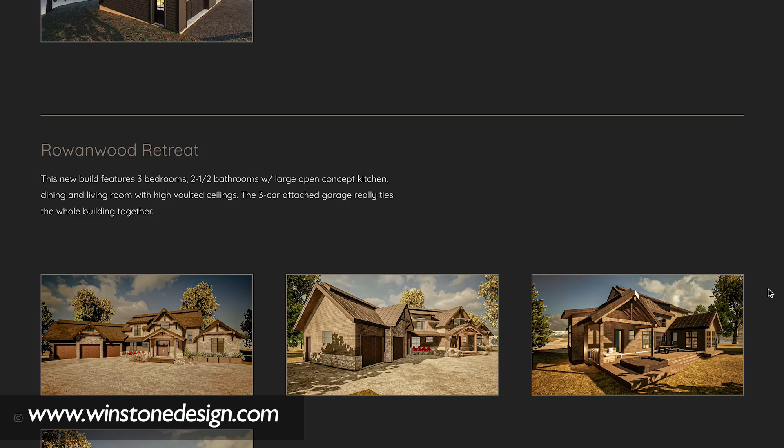I think it's important to note, because I want to stress, that the level of detail produced by tools such as ArchiCAD and ArchiFrame together is completely possible and efficient to manage on your own. And integrating this into a bigger firm is definitely easy.

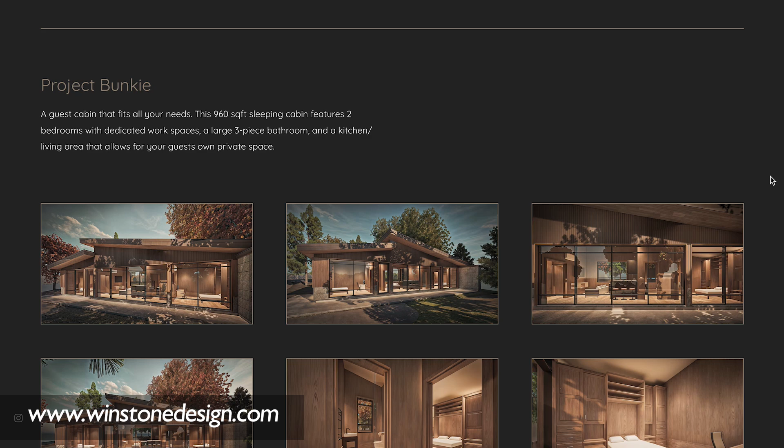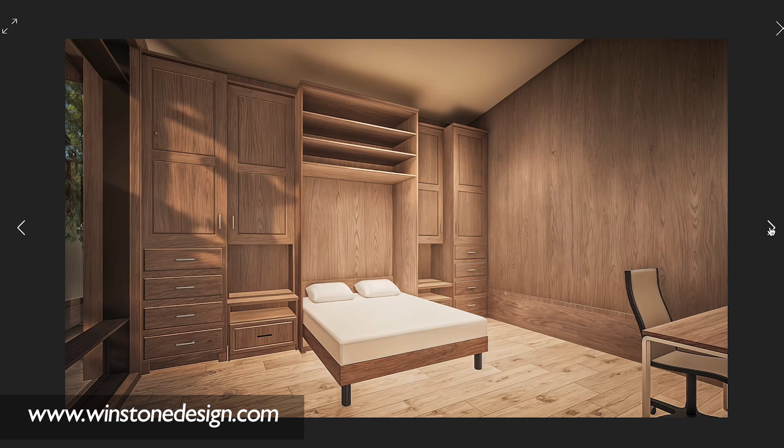I've been operating my business since 2020, previously as a dedicated Revit user. But as of 2023, so for the last 2 years now, I've been fully using ArchiCAD. It was definitely a stressful switch. I can talk a little bit about the benefits I see with ArchiCAD, but along with that came ArchiFrame, and its integration has completely transformed the way I do documentation.

This is a simple 22-foot by 22-foot garage that was done for some customers local to me here. They're actually friends of mine, but this is just to show the level of detail that gets put into this.

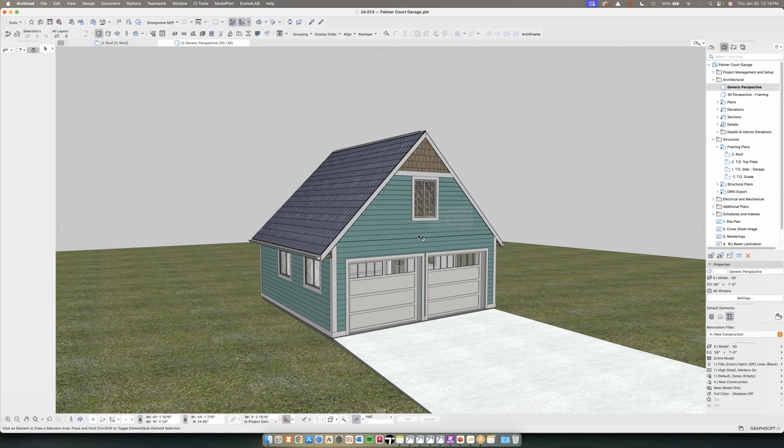So this is the generic 3D model that most people would see, but just by creating a layer combination, we can take that model and turn it into a complete wood frame structure with individual components for lintels, trusses, outlooker framing, sub fascias, and nailers for soffit. Again, it's very simple, very straightforward and easy to use.

I won't do much examples, but just to show you the power and level of detail within this, all of this is automatically generated.

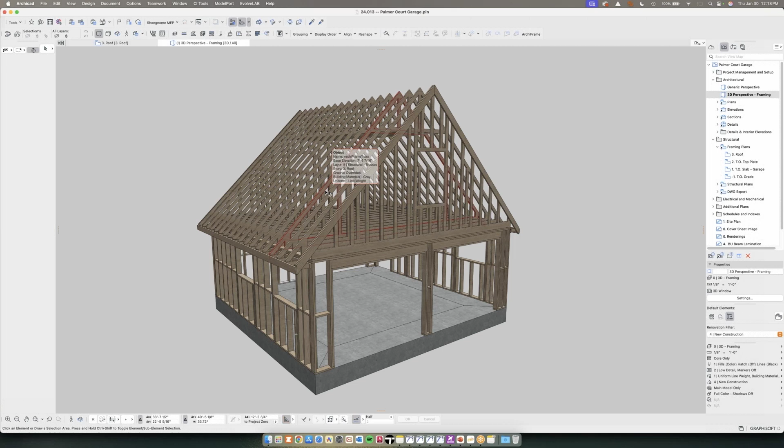In terms of scale and time, this entire building was probably framed out in under an hour for trusses, wall framing, and everything. And this entire project was probably completed start to finish, from concept to final documentation, in about 32 hours. It's a really efficient process once you get the parameters set up.

And the people at ArchiFrame have been really fantastic in terms of catering and tailoring the parameters that I want to see on the plans, which has been fantastic.

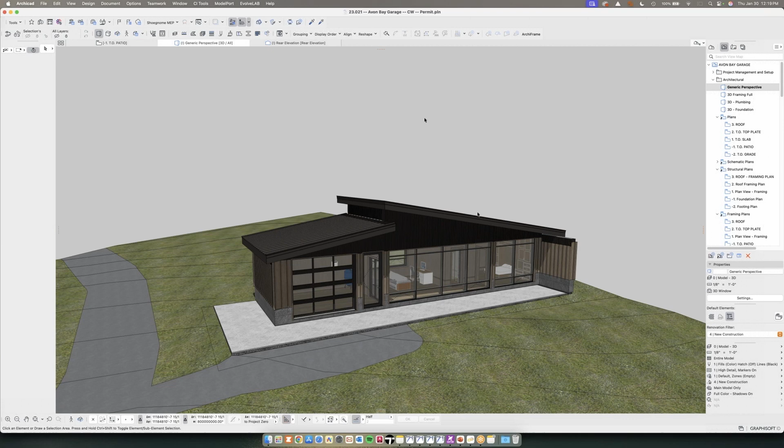This is that Bunkie project that showed a little bit of detail previously in that slideshow. So again, it looks relatively simple and basic from a high level perspective. But if we dive into the 3D framing aspect, there's a lot more going on that sometimes is difficult to convey in a 2D detail or element.

So integrating steel headers and steel columns, again these are all done with ArchiFrame components. I'll show in a bit, in the other project, how it's really an advantage to use an ArchiFrame beam versus an ArchiCAD beam in terms of documentation.

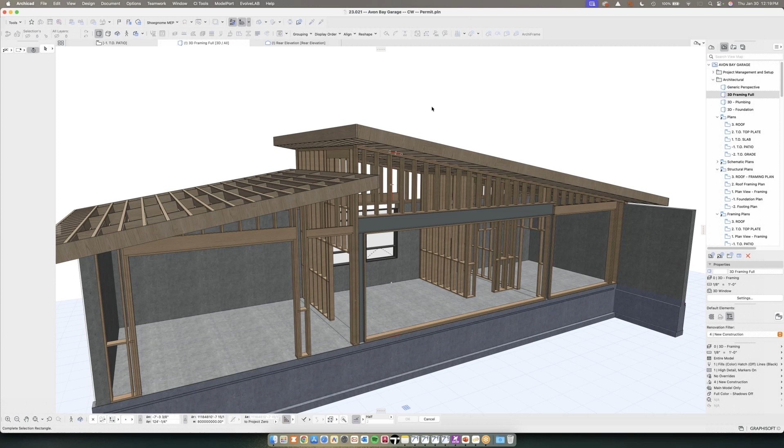But the ability to frame out these walls, show the lintels, see how the rear concrete walls actually interact, and frame the rake walls on top and build the lintels into those components, I think is really powerful.

But even with something where we're doing an unconventional roof framing structure, I have a TJI roof rafter in an unconventional direction with a sistered-on 2x10 beside it.

So the ability to have this in the 3D model and share it with the contractor through BIMx, and walk them through this so they can see it, saves me time on the documentation side as opposed to needing three different details to show this one element.

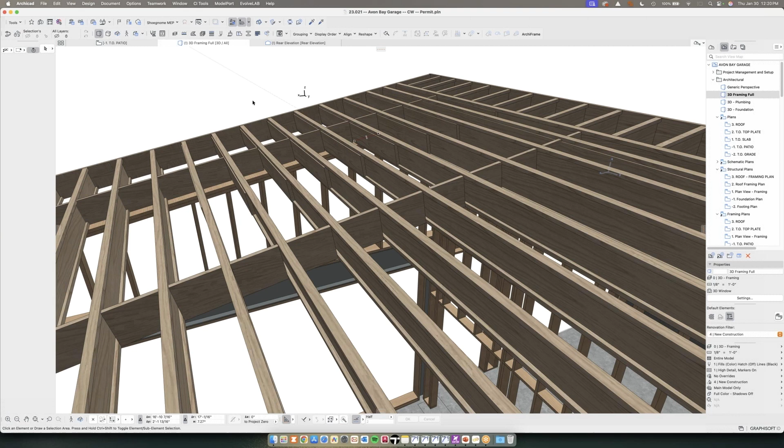So again, a relatively complicated build in terms of trying to integrate trusses and rafters and wall framing. There's a lot of elements in this building too that require tall wall framing on the backside, so we're using something like a Weyerhaeuser LSL stud, if you guys are familiar with that.

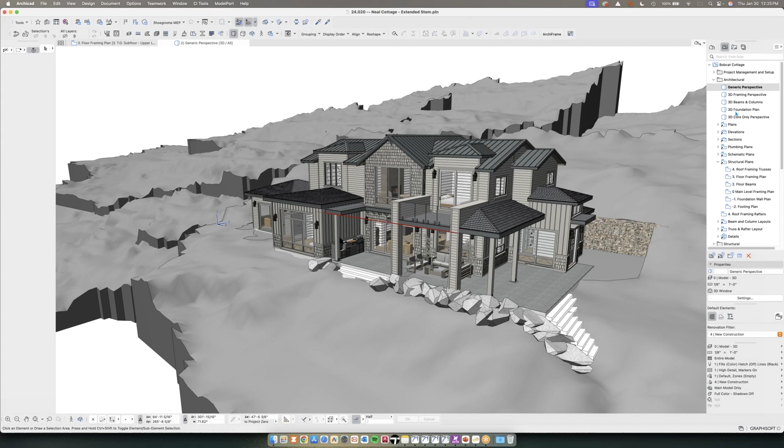But to drive down into the individual elements and components, I've been able to separate these out for foundation plans. And all of my pad footings and strip footings, I've been able to convert to an ArchiFrame element, which allows me to then show them in the schedules as I showed before.

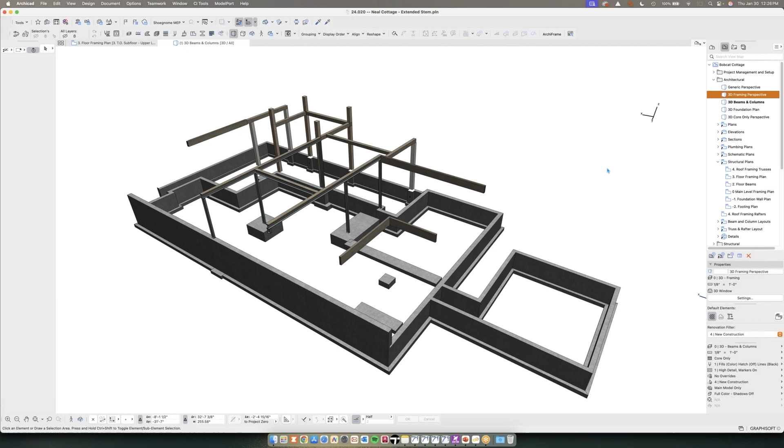But I'm able to then highlight the foundation plan, the beams and columns just as themselves, to visualize where just the structural components are in this building, and then detail out in high detail the wall framing.

So as an example, this project is relatively complex. I was able to frame out this entire building, walls, rafters, trusses, and foundation in about, I'd have to go back and add it up, but probably somewhere in the neighborhood of 12 to 13 hours, which sounds like a lot, but to provide the detail where I don't need to 2D detail any element on a drawing, I think it's a huge advantage.

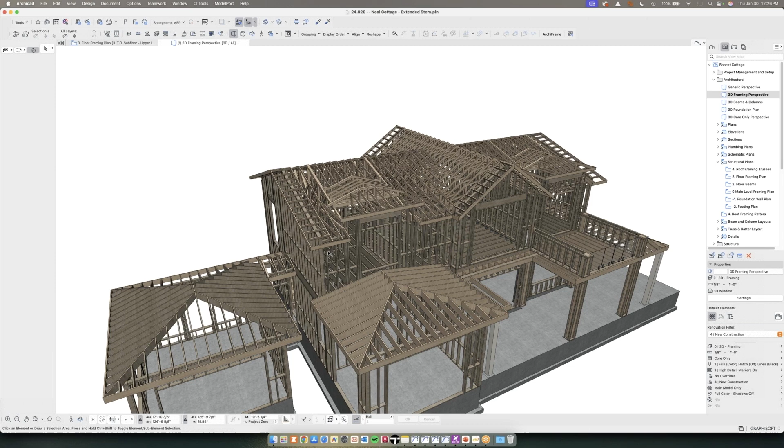And just the ability to share this information and how it interacts with the building to get it across, I think is hugely powerful. I mean, we're showing TJI floor joists.

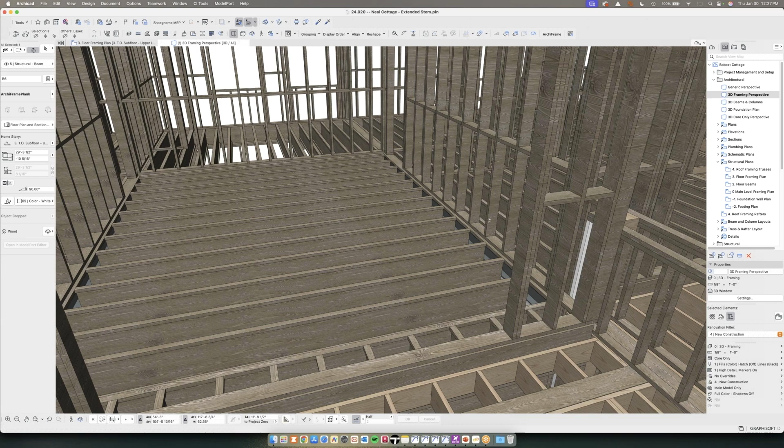One of the elements we needed to share in this particular project was how we set up the beams. We wanted everything flushed into the building, so we went with a steel beam header here, and we can see how there's a big drop from the underside of the steel beam to the 16-inch I-joist floor joists. That's primarily so we can get plumbing, HVAC and mechanical structures underneath without needing to cut joists or drop bulkheads in this building. So again, being able to share this level of information with the client is hugely powerful.

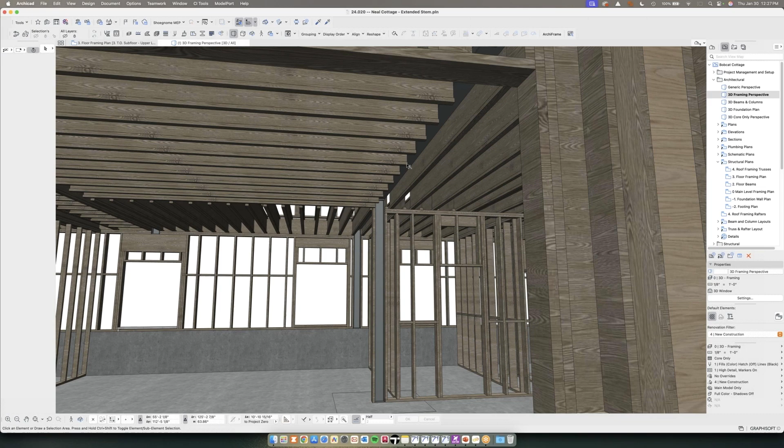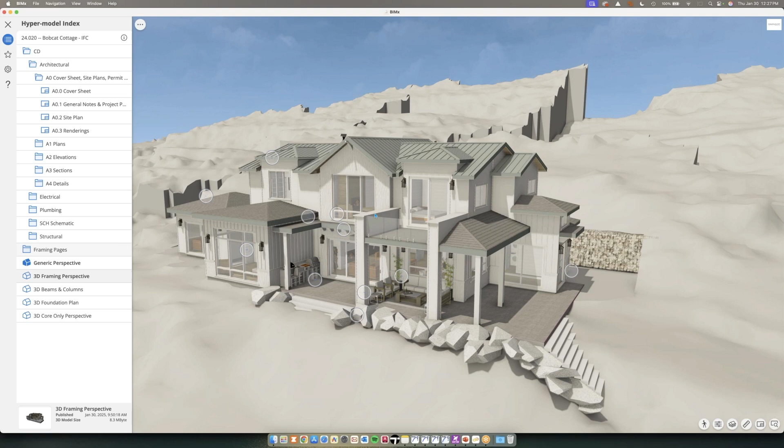Further to that, this model being exported to BIMx, this is where I think it's truly powerful from a contractor perspective, because that level of documentation is then exported out. So again, all those 3D models and elements are put into this same ArchiFrame element. We can see how this building is getting built, how everything is interacting with each other.

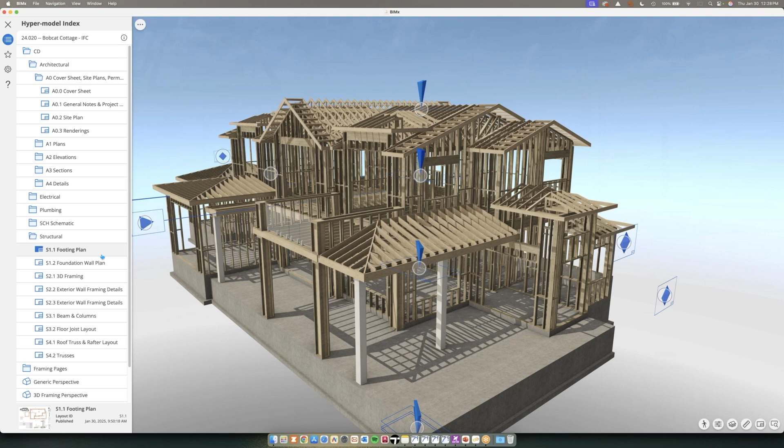But what I find truly powerful in terms of being able to utilize this with schedules is if I go to a structural plan and I wanted to go to a footing plan, for example, because I've been able to hyperlink and tag properly the footings or the beams or columns, everything now appropriately shows up in a schedule.

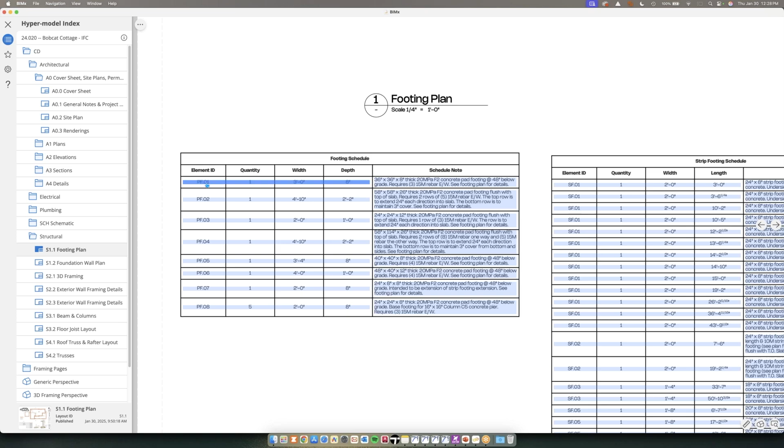So for example, here in the strip footing schedule, I'm able to show a footing schedule. That footing schedule has a width, a depth, a tag, and the construction elements for that specific footing. But if I wanted to click on that element, I can now select it in BIMX, which takes me directly to that element in 3D, so I can see where it is in order to find it. Same thing for beams and columns.

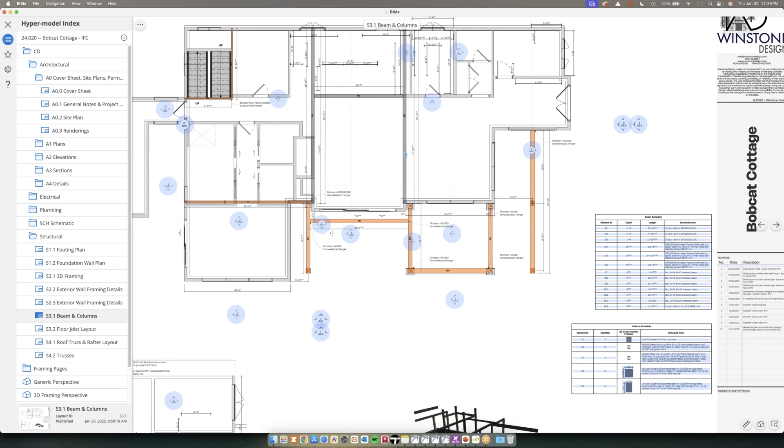If I go to the beam and column page, I'm able to either click on a section view, or go to my beam schedule, which we can see here. And if I want to know where B8 is in that specific model, I can open that and it automatically takes me to where beam 8 is.

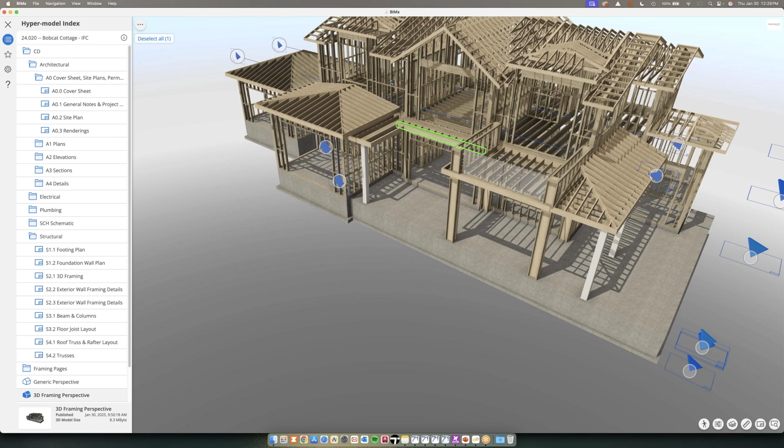So if I'm having difficulty finding it in a plan view, I can easily take it to there. And then same thing, because all these elements are in 3D, I can grab a section view of this building and open the section in 2D, or open it in 3D if you're familiar with anything like that. I can open that section in 2D, and now it actually brings it through, so I can see in real space where that section's being taken. And since all these elements are brought in via ArchiFrame's 3D version, all of this is now an element of the structure.

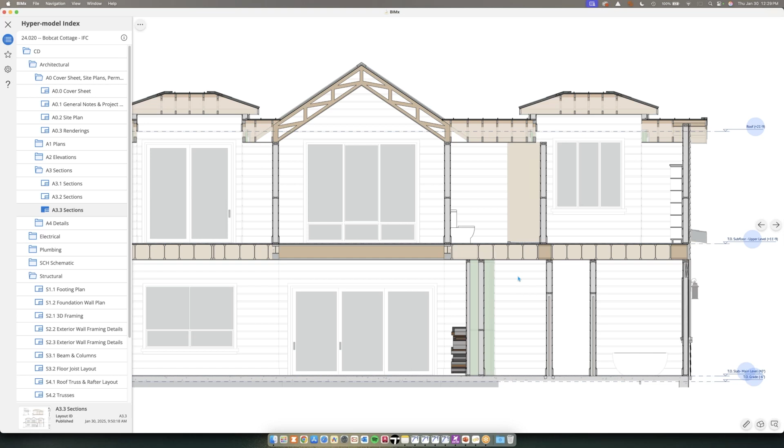So I don't need to add the 2D X-box symbol for wall framing top plates. I don't need to add in an I-joist 2D element and then array that across at 16 inches. It's implemented in here directly right away.

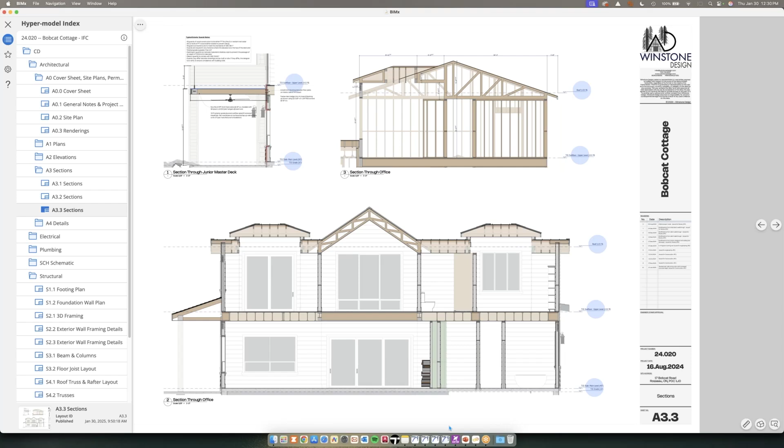So that's sort of high level in terms of how it interacts with BIMX. And then working closely with ArchiFrame, the output for wall framing, for example, as Tom alluded to, the documentation is automatically generated from the ArchiFrame wall element tool. So it gives you cut lists, beam locations, tags everything with dimensions, gives you squared off dimensions here, and gives you cut lists even for paneling.

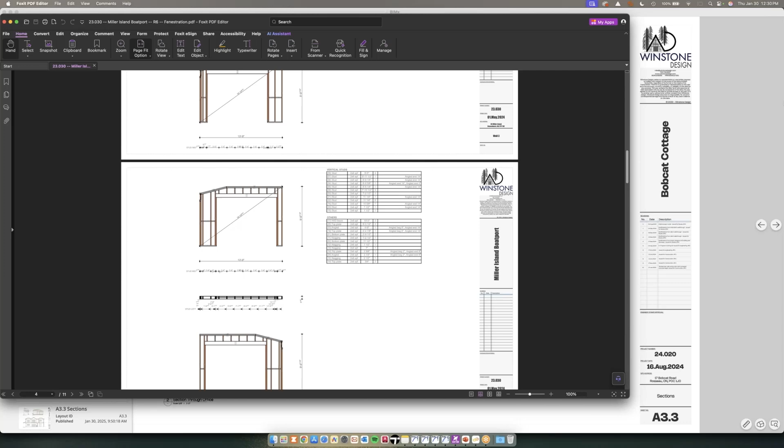So in terms of ease, in the 12 to 13 hours it took me to frame out that building, it now automatically generates the wall framing layers. So if I go into main level framing, as soon as I draw that wall framing element, it shows all those elements in 2D. It automatically creates the 2D drawing of that individual wall element.

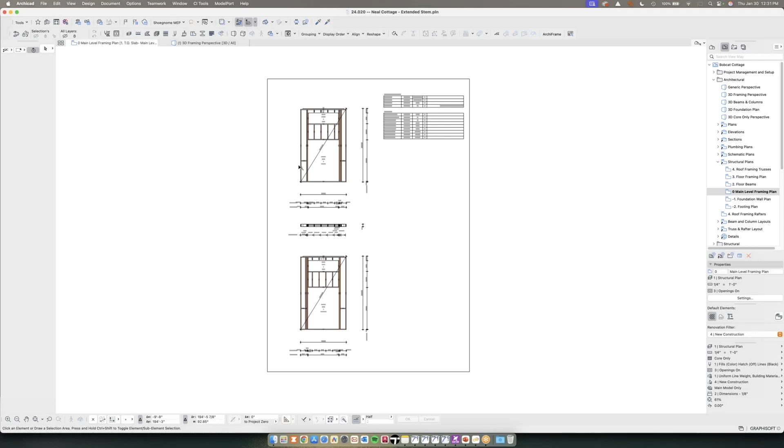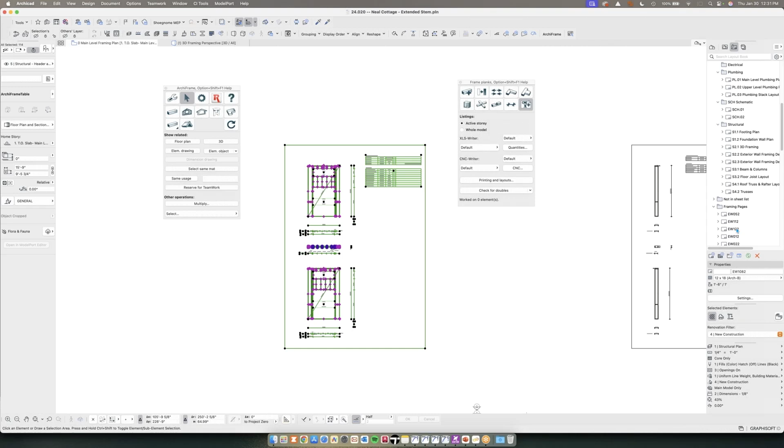It gives cut lists, and very simply, by selecting that option and going into CNC printing and layouts, it automatically creates all of those drawings on a sheet size of my selection in my layout book. So for example, all of these are the individual wall elements, automatically created and generated on a specific sheet size.

So it's a really powerful tool. The contractors absolutely love it. It's just a secondary check from everybody's perspective.